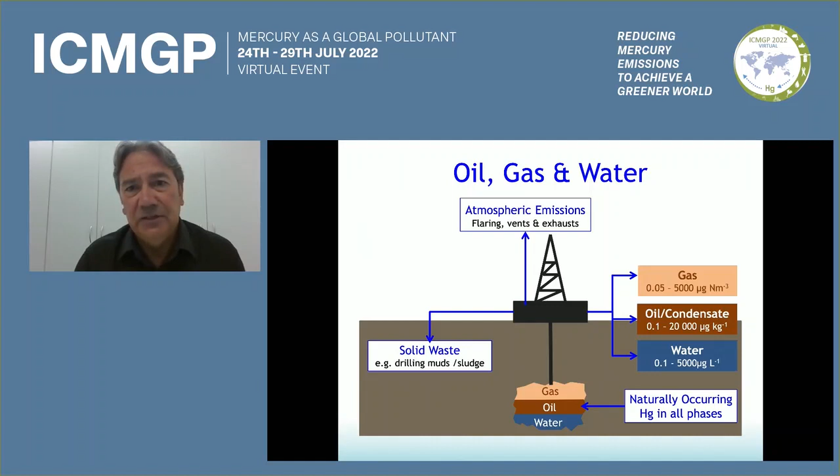During the extraction, of course, we also get some solid waste generated, such as drilling muds and sludge, and also some atmospheric emissions from flaring vents and various exhausts within the process.

Most of the work that we have done has been in Asia, Northern Europe and also South America, which is where the hotspots of mercury are.

The other thing to mention is that there's a general trend in that the deeper the well, the hotter the well, and the sweeter the well, the mercury concentration tends to be higher. As we explore new fields, we're likely in the future to get more fields which are high in mercury.

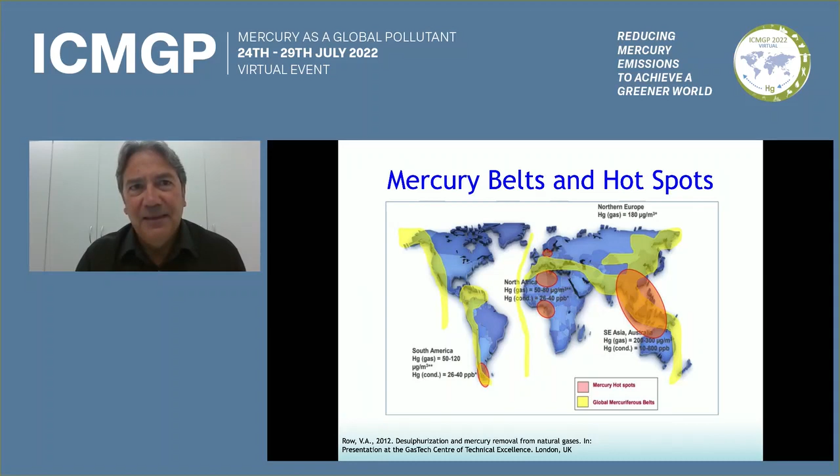The oil and gas industry have been dealing with mercury problems really over the last 30 years. I think at the start, they were a little bit in denial about the amount of mercury they might have in their process.

But these days, I think mercury is well managed, and there's a good understanding within the industry, but there's still a lot to learn.

The main thing to realise is that most of the measurements for mercury in gas are done to protect the process equipment. As mercury flows through a gas plant, for example, it has to go through some cryogenic heat exchangers, which are at a low temperature. Even at low concentrations, this mercury can pre-concentrate and build up, and it can, in some instances, lead to a cold box failure.

Mercury can also poison the catalysts which are used in the refining process. This can lead to plant shutdown, an interruption of supply, and financial losses. And in a couple of cases, there has been explosions due to the failure of cold box components, so there's obviously a hazard involved in that as well.

All of the gas products and oil products that this industry generates are exported with quite tight specifications. If these specifications are not met, then the products are either rejected or they have to sell them at a reduced revenue. So there's some commercial reasons why people want low-level mercury in these streams.

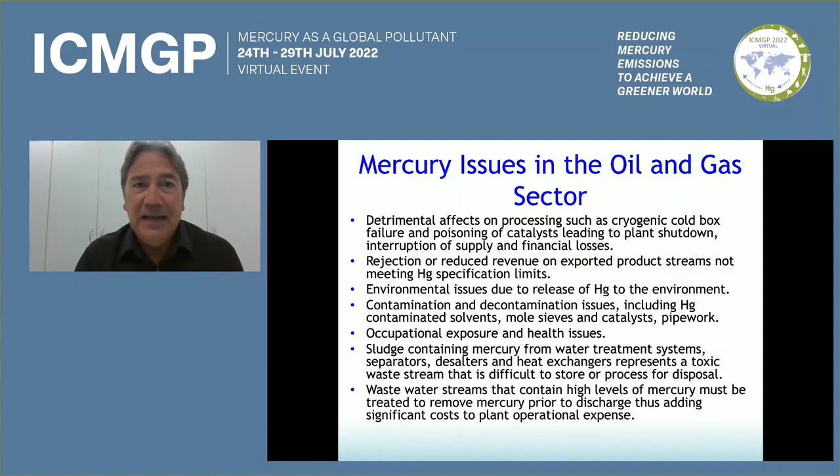So during the extraction, what can happen if the concentration is high, the mercury in the well as it's extracted can start condensing as small mercury droplets. Then, as it goes into the separator, it can fall out due to gravity and get attracted to sludge and waxes. Then that will go into the water phase as ionic mercury and elemental mercury, and it can also go into the oil as sludge and the elemental and dissolved forms.

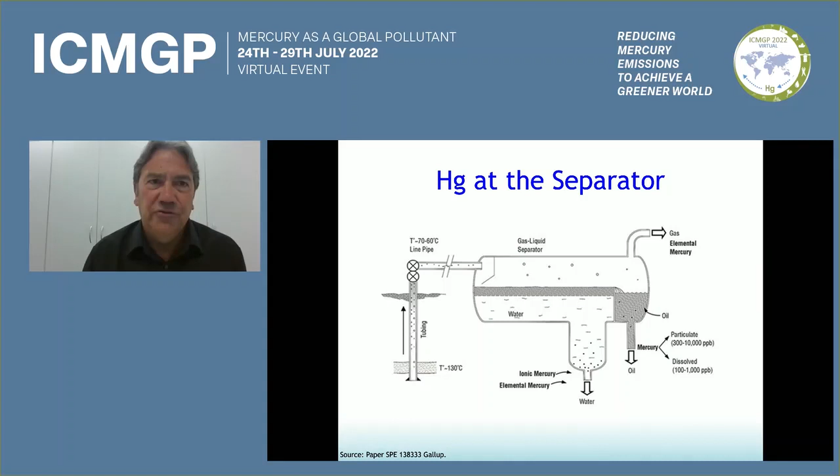The volatile elemental mercury from this process actually goes to the gas phase. So it's a complex operation which is different on every site, and it also depends on the process conditions and the concentration of mercury in the well in the first place. This is an important slide, because what I'll talk about later is the importance of measuring at this location so we can look at the true levels of mercury generated from this industry.

I'd now like to show a very short video clip of elemental mercury condensing on an offshore platform.

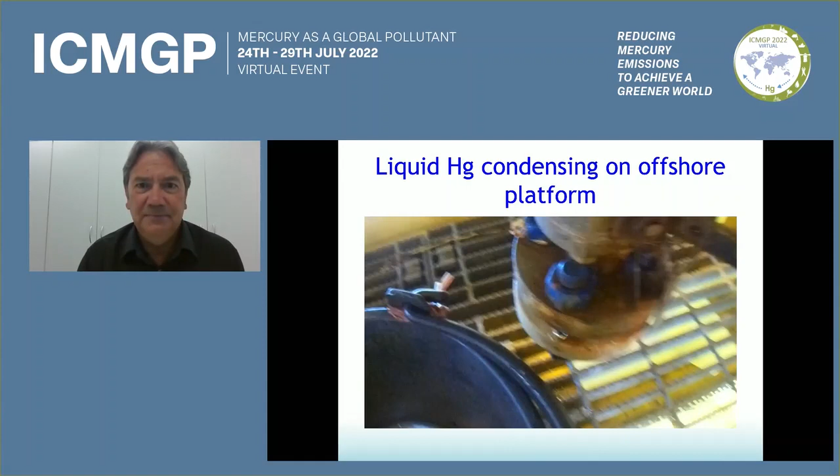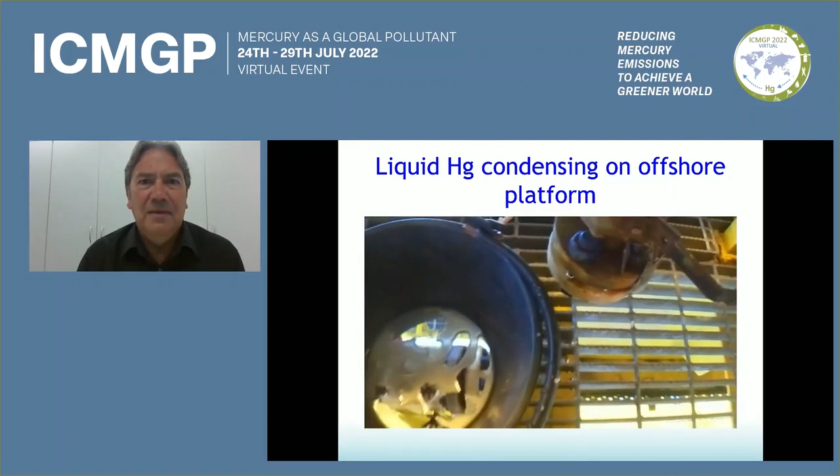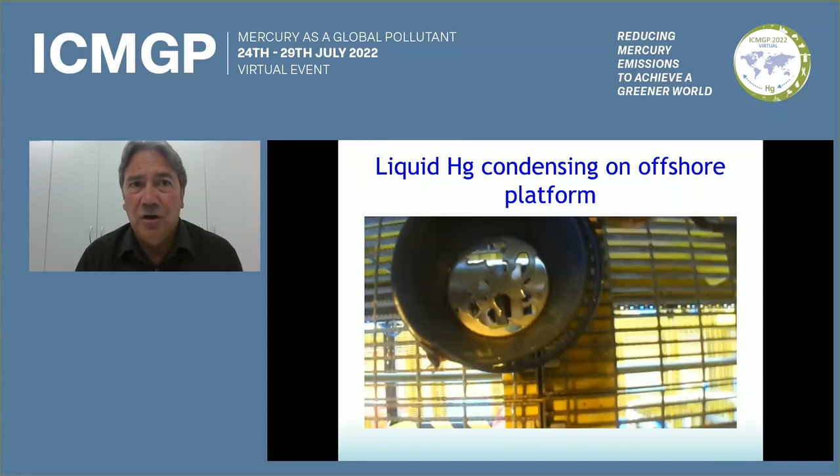What you can see here is pure elemental mercury condensing from the process, and this can build up over a period of time. I've been on sites where they have to release this mercury and decant it off almost on a weekly basis. This is really one of the unaccounted emissions of mercury on these gas plants. This typically only happens when concentrations are high, but there are places in the world that have to deal with this problem.

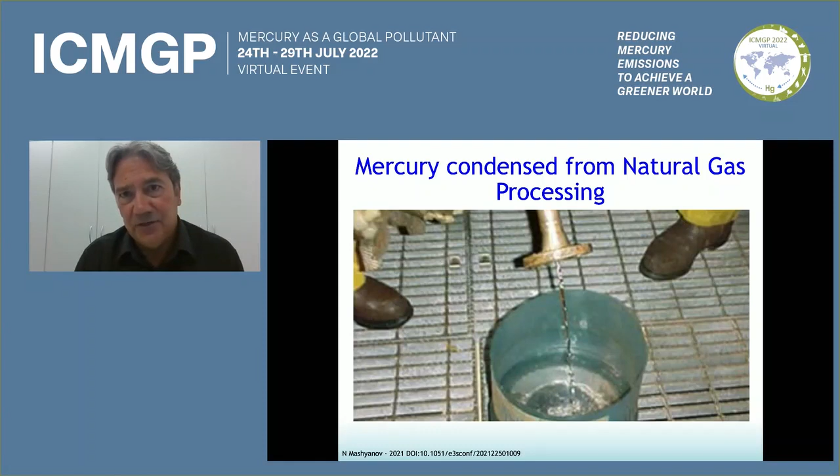You can actually explain this process by looking at the vapor pressure curves and relating the concentration of mercury that we measure to a process concentration. Most people actually forget that the process concentration is highly concentrated, because if you take gas at 1 microgram per meter cubed, for example, that's your measured concentration, and if it's in a process at 50 bar, the actual concentration in the process would be 50 micrograms per meter cubed.

At 100 micrograms per meter cubed, it'll start condensing at about 12 degrees. At 1,000 micrograms per meter cubed, you'll start condensing at about 38 degrees.

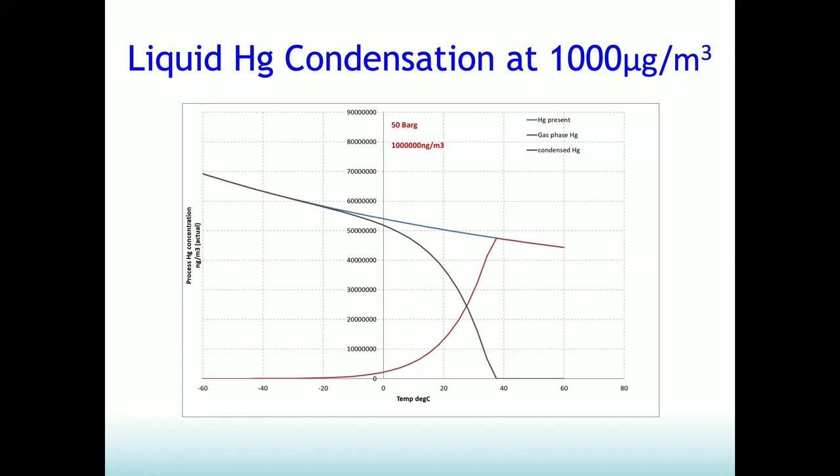So if the concentration is high, there's a temperature drop at the wellhead, you will get mercury condensation. But this condensation can also occur anywhere in the process if you reach saturation conditions, and that is one of the reasons why you get cold box failures.

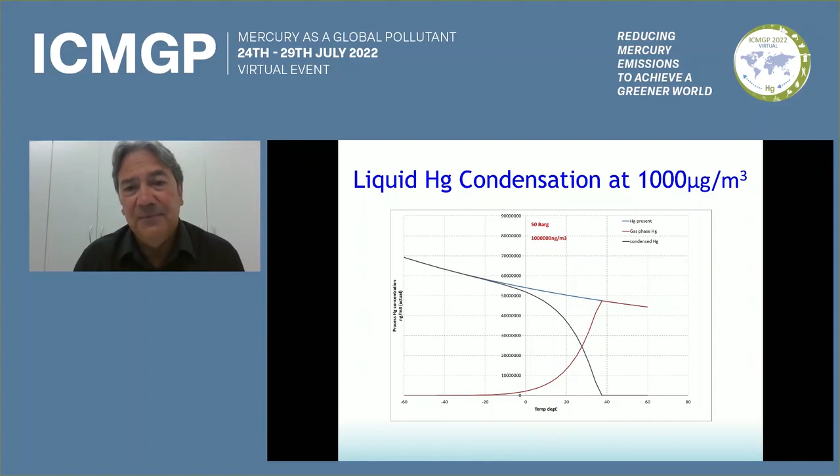During the extraction, you also generate a lot of produce water and drilling fluids, and of course the refining of crude oil generates a lot of wastewater. Approximately 250 million barrels per day of water is generated by the industry, and this quantity increases with age and production rates.

Some of this water gets re-injected back into the well, and some of it is discharged. The exact ratios of what is discharged, I couldn't find this information, but this is the estimate that I've taken a stab at.

The concentration, as I mentioned at the beginning, for produce water is extremely variable. We've seen concentrations between 0.1 ppb and 5 ppm. The discharge limits for the industry vary around the world, and we've seen discharges of less than 0.1 ppb as high as 100 ppb.

The other thing to realise about mercury in the produce water is it's normally associated with particulate material and sludge. So if you filter the produce water, which is a requirement because you have to remove any oil and dissolved solids before discharge, that filtration system will collect mercury. Overall, I would say the discharges are well regulated, and the emission to the environment is probably low from this, but the volumes are very high.

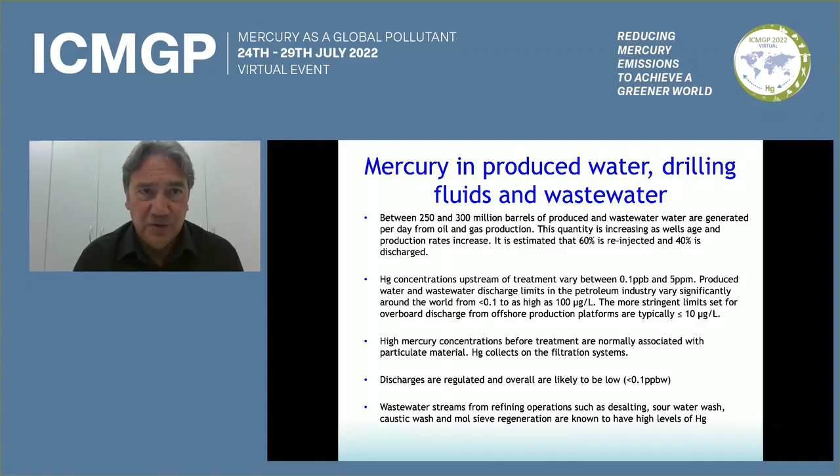In order to estimate the annual discharge, I've taken 5 different concentrations which we've encountered, and applied that to the discharge rates on an annual basis to calculate the tonnes per year we might expect. So if we're down at 0.1 microgram per litre, just looking at the 40% discharge into the sea, we're probably around 0.6 tonnes per year.

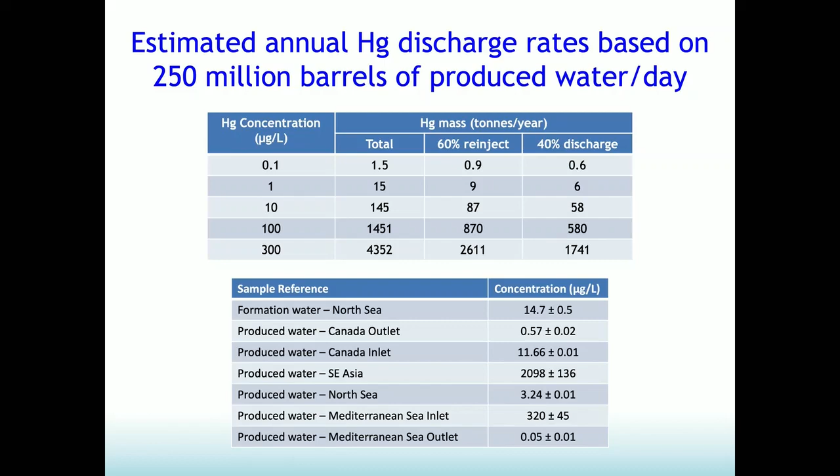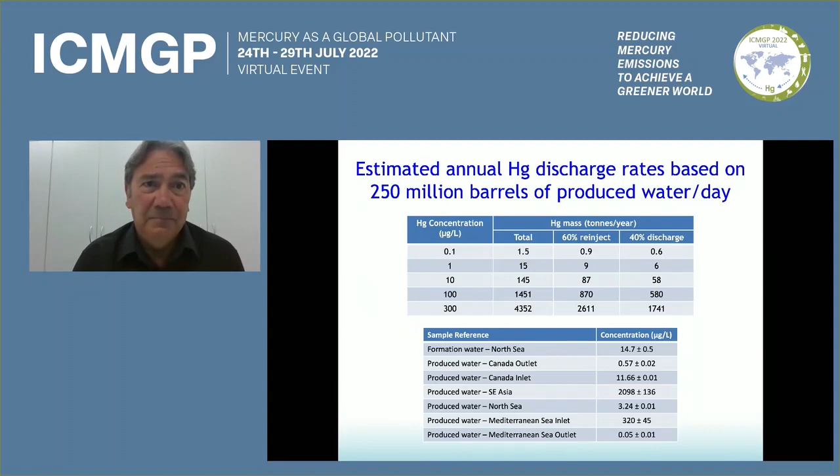But I think what we have to consider here is the amount of mercury that's generated from the process, which has to be treated. In this case, you could have several hundred or even maybe thousands of tonnes of mercury which has to be removed by the water treatment. So the fate of this mercury needs to be considered. In this slide, I put some concentration ranges that we've encountered from our work in the field.

So I've got 2 case studies I'd like to mention. The first one is an offshore platform in the Mediterranean Sea. This produces gas and crude and also about 4,200 barrels per day of produce water. The inlet concentration at this site was measured to be 320 ppb and the discharge about 0.05.

We know from this site that the filtration process removes nearly all of this mercury, but it still means that the site generates about 100 kilograms of mercury per year, which is collected in the treatment process. And the fate and disposal mechanisms of these filtration systems is not really known or documented to my knowledge.

Another example case study is in the South China Sea. This is some work by Darrell Gallup. Again, they have about 20,000 barrels per day of produce water, high concentrations. But in this case, they decided to inject the produce water back into the well. Before they do that, they still have to filter and clean the water, and that could equate to about 230 kilos per year.

So this is just 2 sites. And I'd like you to bear in mind that there's actually 12,000 offshore platforms worldwide. So even if this concentration is low, this is still a significant amount of mercury.

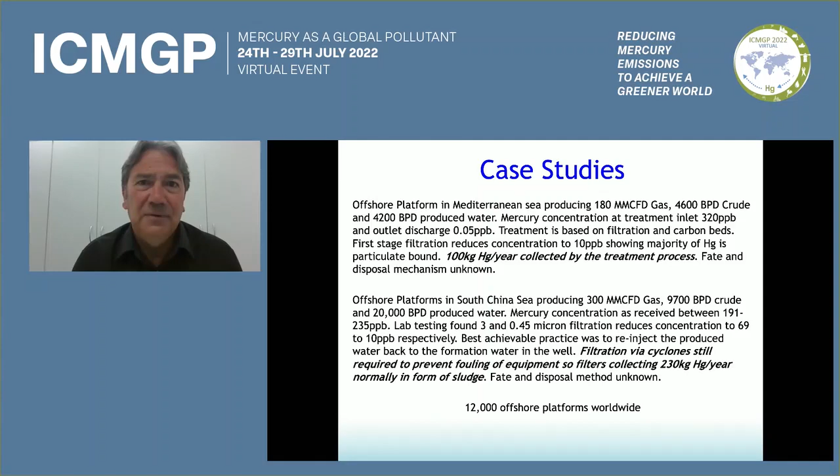During the extraction, drilling fluids are used, and it's quite well known that water-based drilling fluids, which contain barite as a weighting agent, contain some mercury. So we took 10 commercial barites, tested them for total mercury content, and found an average of 22 parts per million. This was a little higher than we expected because the US specification for dry barite is around 1 ppm.

So if you look at the annual discharges of drilling fluids, that equates to about 0.5 tonnes of mercury if you use the US specification, or about 11 tonnes of mercury per year if you use the mean that we found.

I couldn't find much information about drilling discharges onshore, but the amount of discharge is much higher - it's 53 million tonnes. So I think it's very difficult to establish the amount of mercury that's coming from these drilling fluids, but again, it could be quite significant.

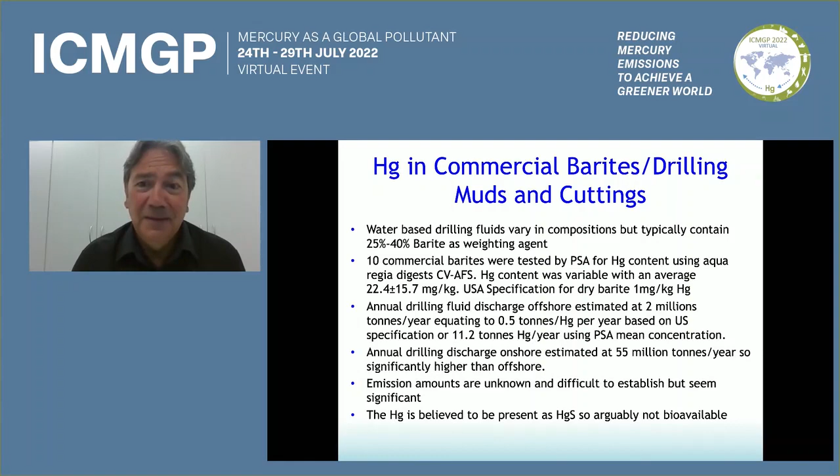And it's believed that the mercury is in the form of mercury sulfide, so arguably it's not bioavailable.

Now coming on to crude and condensates. We've already mentioned there's a very wide concentration range, but speciation is more complex, which means it's more difficult to predict how the mercury will behave during the refining process.

We do know that certain processes like desalting and caustic wash treatments would remove mercury. And we also know that when you stabilize a crude, which means you get rid of the gaseous components, the elemental fraction that's dissolved in that crude is released to the overheads.

It's also well known and accepted that during processing, the mercury tends to pre-concentrate in the lighter fractions. It also gets lost in the actual refining process in all of the pipework and vessels and collects in the sludge. So it's extremely difficult to do mass balances on these type of facilities.

Mercury cleanup is used, but predominantly mainly for the lighter products and the refined products, and there are some quite tight specifications that the industry has to meet. But the heavier streams like diesel, kerosene, fuel oils are not actually normally cleaned up for mercury.

And so there's a lot of these fuels that actually are combusted in various processes, and they haven't really had their mercury removed. So that again is potentially quite a large emission due to gas emissions.

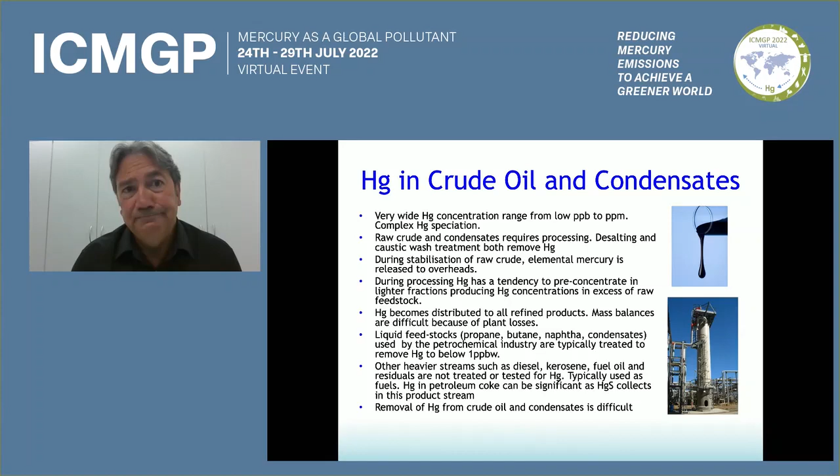So what I did is I took the annual crude production per year in tonnes per year for different regions. Then I reviewed the literature, and from there, there's a few papers which assign average values for each region. This is very speculative and it depends on what paper you read.

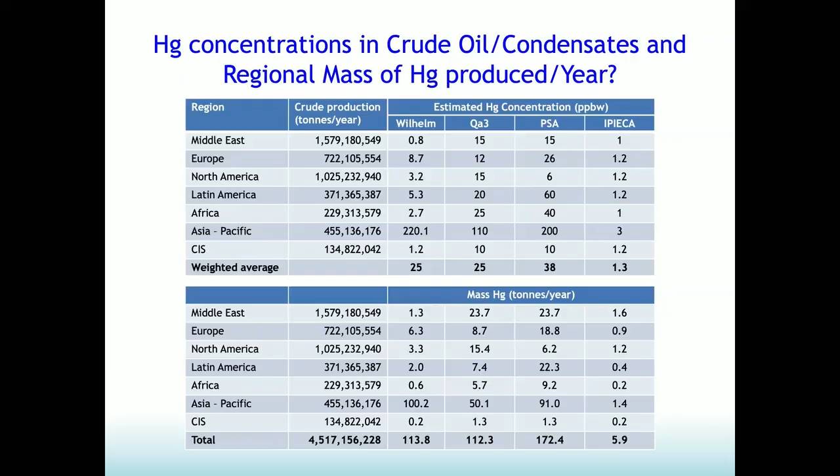There's a good paper by Mark Wilhelm. There's some nice data that Qa3 have presented - this is another testing company based in the UK, specialising in the oil and gas industry. We have our own data, and also there's IPIECA and UNEP reports.

And when you apply those numbers to the annual production rates, you can see that there's a big discrepancy on what people believe is being emitted, between almost 6 tonnes a year to 170 tonnes a year, depending on which data sets you take.

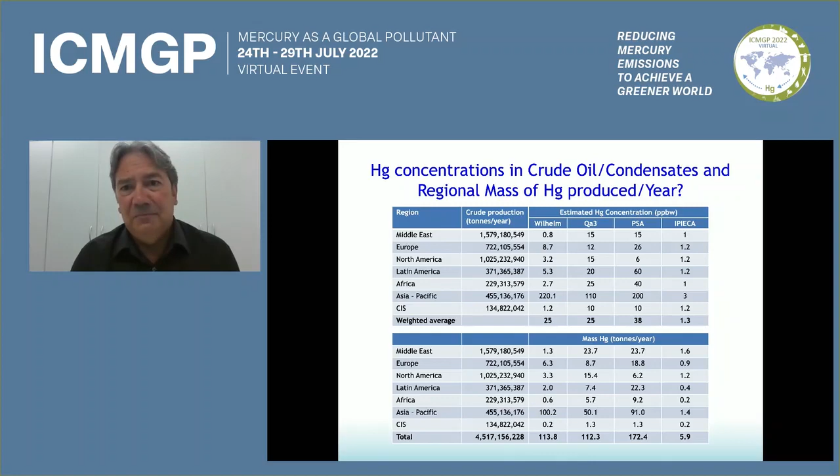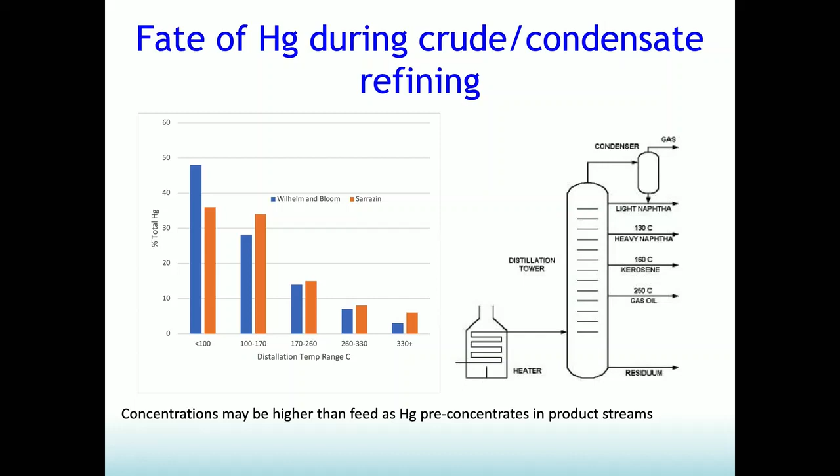We do know that during the refining process, mercury goes into all of the products, and as mentioned previously, the mercury in these feedstocks tends to go up into the lighter fractions. Even if these feeds contain some particulate mercury, a lot of that particulate mercury is mercury adsorbed to particles. During the distillation process, this heats up these particles and the mercury gets released to the lighter fractions. If there's cinnabar in the sample, or mercury sulfide, then this would tend to go to the residue and go through the vacuum distillation process to the petroleum coke.

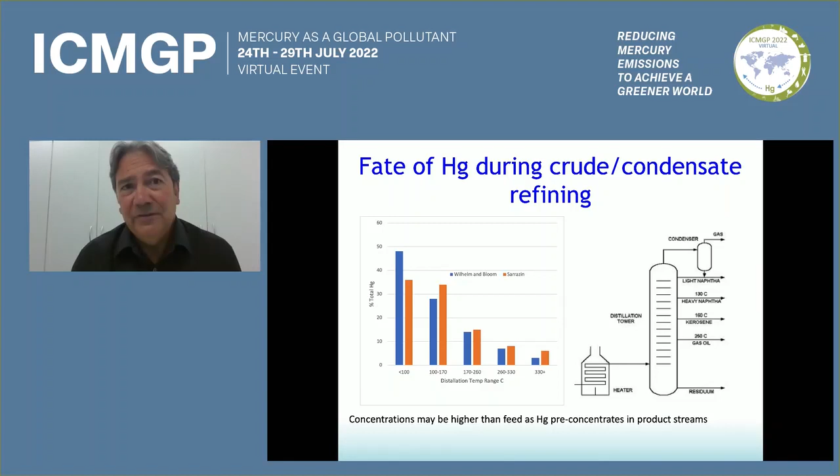Another confusing part about mass balances is that very often when you measure the streams from the refinery, they can be at a higher concentration than the feed, and that's because this mercury pre-concentrates in those streams. So you have to look at the mass flow rather than the concentration flow.

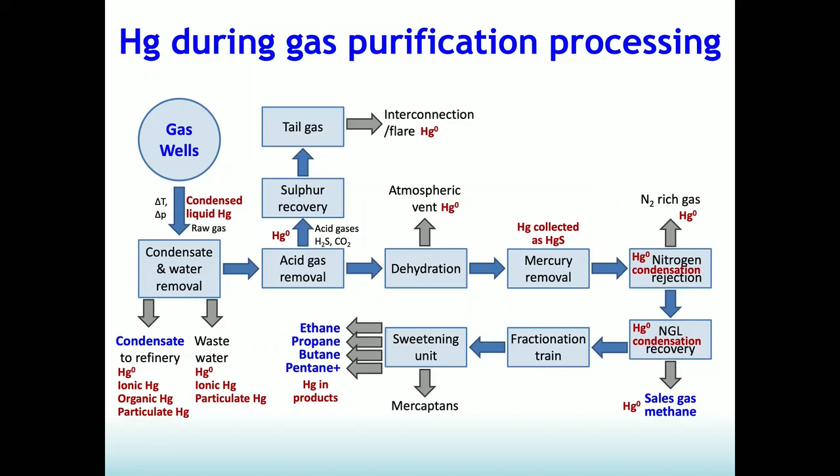Mercury removal on gas plants is very well established and actually very efficient, and it needs to be, because the concentration you need to get down to, to protect the cold box, is around 10 nanograms per meter cubed. Our experience is that these mercury removal units work extremely well in the field, so most of the mercury from the gas actually goes onto the mercury removal adsorbent.

You can also get some mercury losses during the nitrogen rejection and also in the fractionation train, because you're dealing with very low temperatures and very high flows. So even if the concentration is low, it will still collect in this process. It's just about managing this mercury that is not removed. And then, of course, you get mercury in the products, which have to meet the specification.

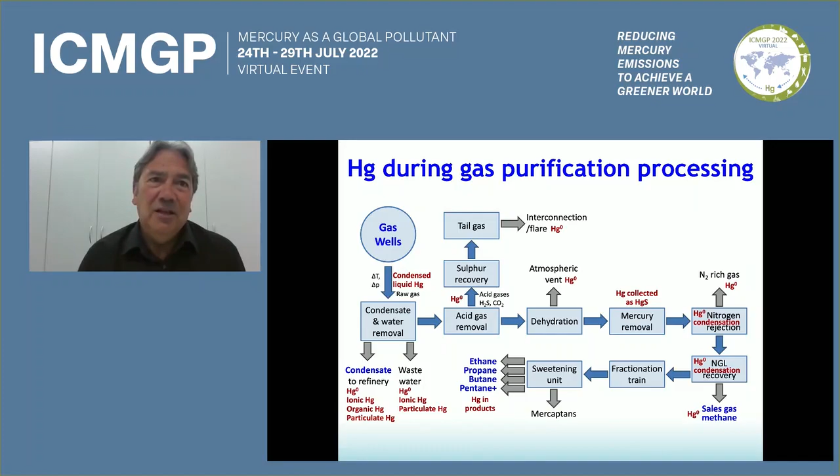Again, the complication is that this mercury will collect in the process in all of the pipe work, so it's very difficult to do a mass balance.

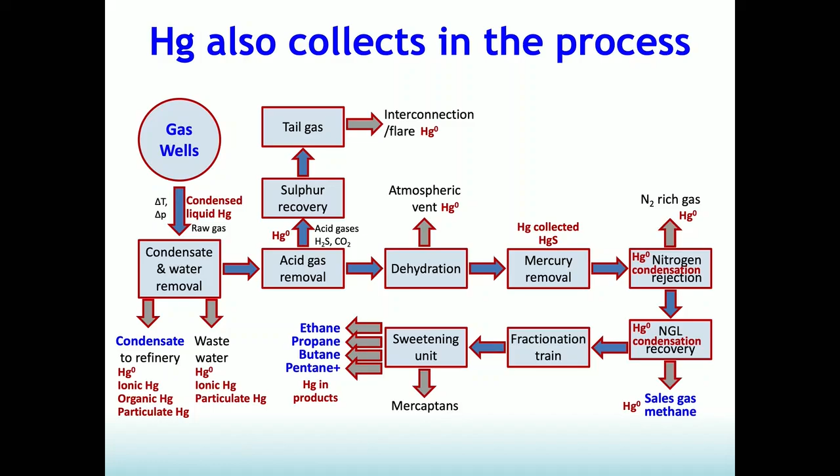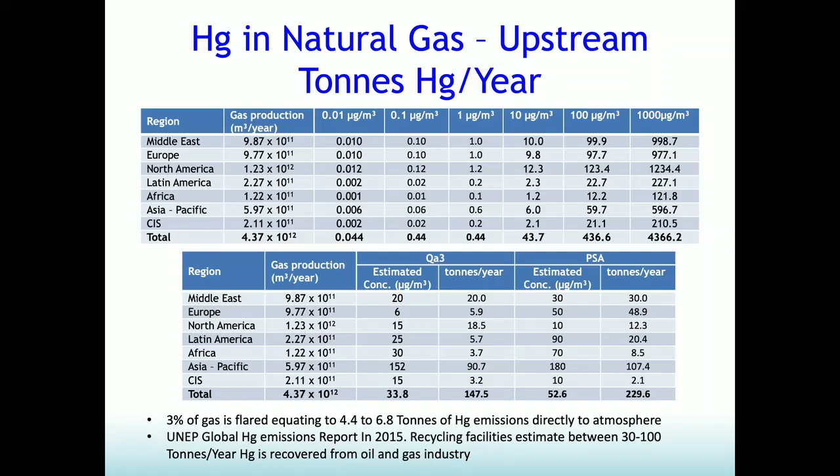I've done the same with the gas as I did for the condensates. I've taken the gas production rate in meter cubed per year for each region, and then I've hypothetically assigned a concentration that we would expect for an average, ranging from 0.01 microgram per meter cubed, which is the specification limit for most sales gas, up to 1,000 micrograms per meter, which is a real extreme, but not impossible to get these levels.

You can see here that there's the potential for a lot of mercury generated from the process and hopefully collected by the adsorbent material, but some of this will be emitted due to the processing of the gas. I've also taken some data that QA3 presented and some of our own personal data, which includes a review of the literature. My best estimate is that the upstream generation of mercury is around 147 to 230 tonnes per year. It's also worth noting that about 3% of this gas is flared.

Whatever number you want to take from these tables, that could amount to an appreciable amount of gas. Flaring normally occurs upstream rather than downstream on the products, so I would say it would be the higher levels that are being flared.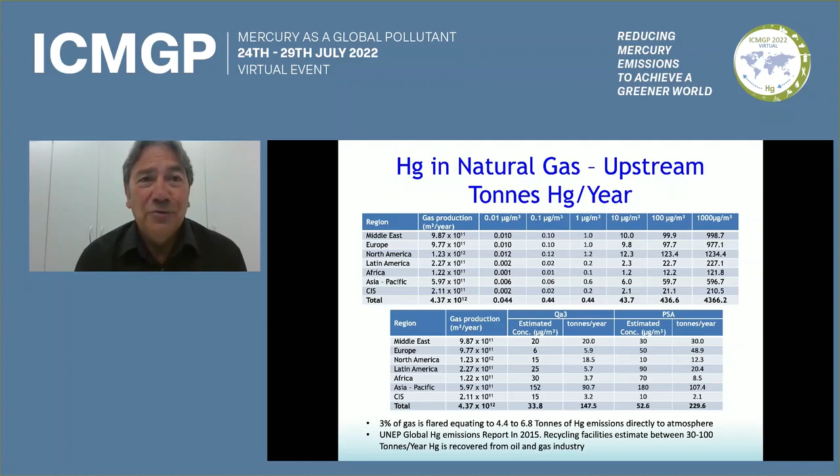UNEP have obviously published some good reports on this topic, and I noticed in one of their reports, they said that they contacted mercury recycling companies. In the year 2015, they claimed that they collected between 30 to 100 tonnes of mercury from the industry. But if you look at the numbers I've presented in this table, there could be quite a difference between what is being recycled and what is being generated.

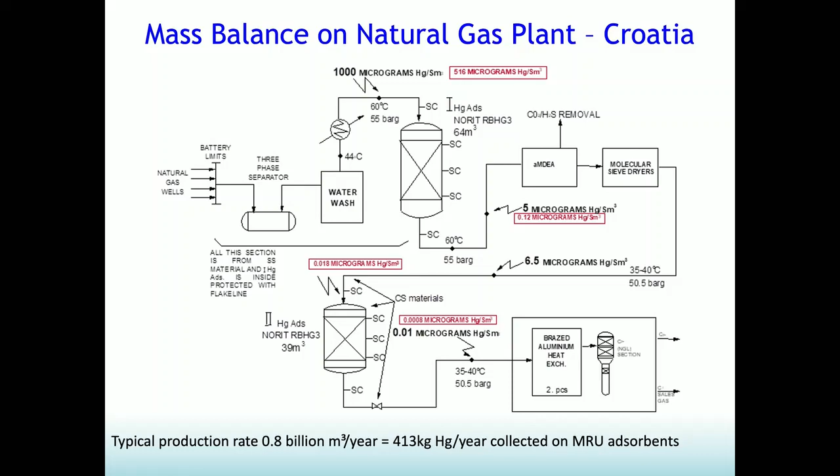There's quite a lot of work going on with decommissioning, and the sludges and debris from the pipelines that people are encountering are extremely concentrated in percentage levels of mercury. So the industry actually generates quite a lot of waste products, and it would be quite interesting to get a better understanding of how these are processed and dealt with.

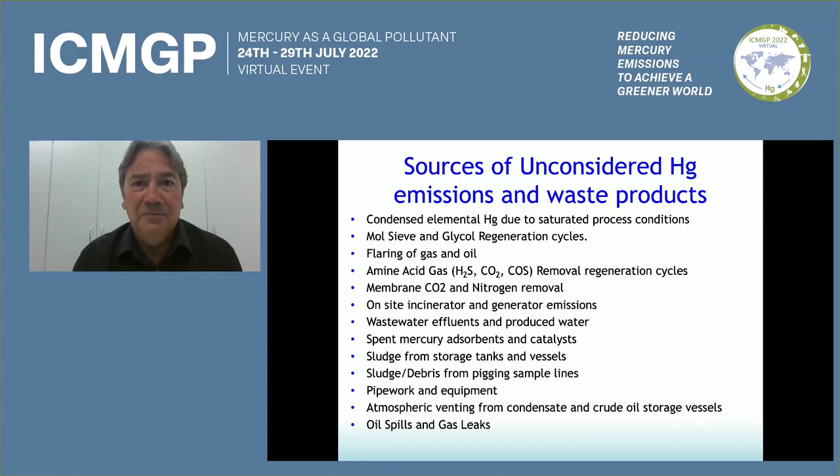So Leslie actually asked me to cover 4 questions. The first one was, what is the major issue and problem in this area? And I would say it's really the current mercury inventory. I don't think it's truly accurate, and it's not fully understood.

I think a lot of the mercury data that is used is based on exported products, and it doesn't really reflect how much is generated during the processing and the extraction.

The next question was, what are the potential solutions to this problem? I would like to see more data reported, and maybe it'd be nice if it was mandatory, to report the levels in the oil, the gas, and the water right at the point of extraction, at the primary separator, because we know the metering rates here.

If we could get a good, accurate number on how much is in these streams before processing, we'd have a better characterization and accountability of how much waste and mercury is actually being generated.

Why has the problem not been solved yet? Well, I'd say there's no real incentive to do the measurements here. It's actually difficult to do the measurements there as well.

Most of the measurements that are conducted are all about testing the efficiency of the removal system and also on the products, to make sure they meet specification. Every now and again, there's a study done on inlet concentrations, but it's not routine testing.

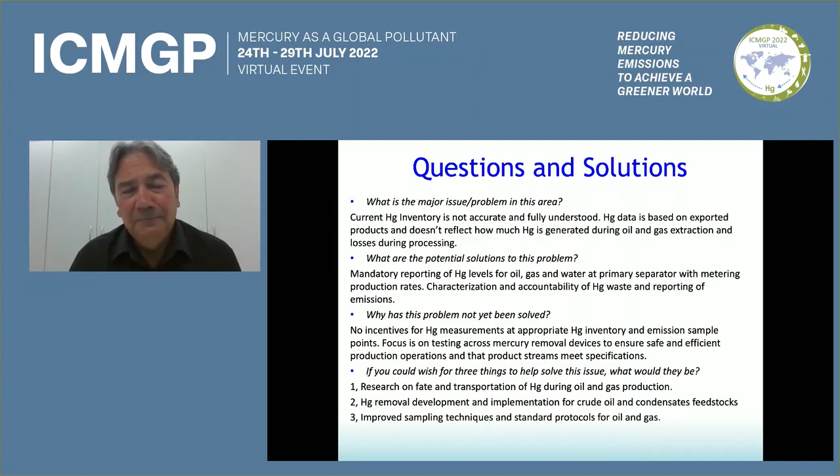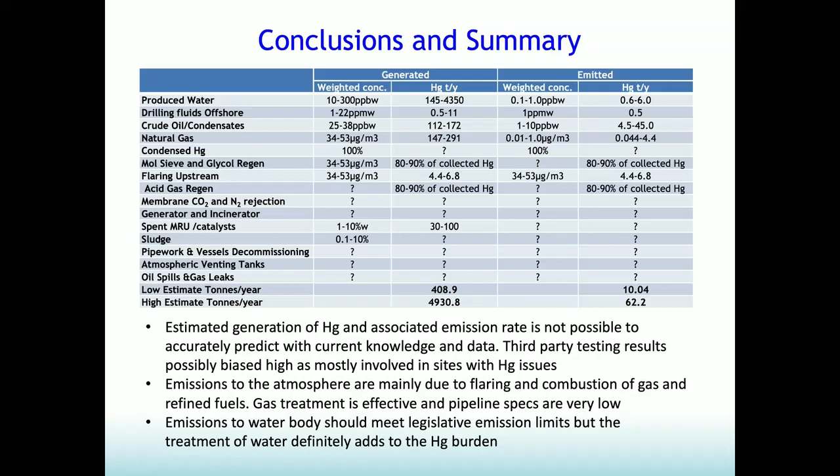So my best estimate, the emitted mercury is between 10 and 62 tonnes, but the amount generated is closer to 400, or maybe even as high as 5,000, tonnes per year. But of course that is managed and collected within the process, on the adsorbent systems. So it's difficult to predict, to really get a handle on how much is being generated and what the associated emissions are.

I think some of the data I've shown, and maybe some of the data from QA3, might be biased high, because we normally get involved when plants have issues with mercury. And of course, there is an emission to the atmosphere due to flaring and combustion, and there's an emission to the water that has to be considered as well.

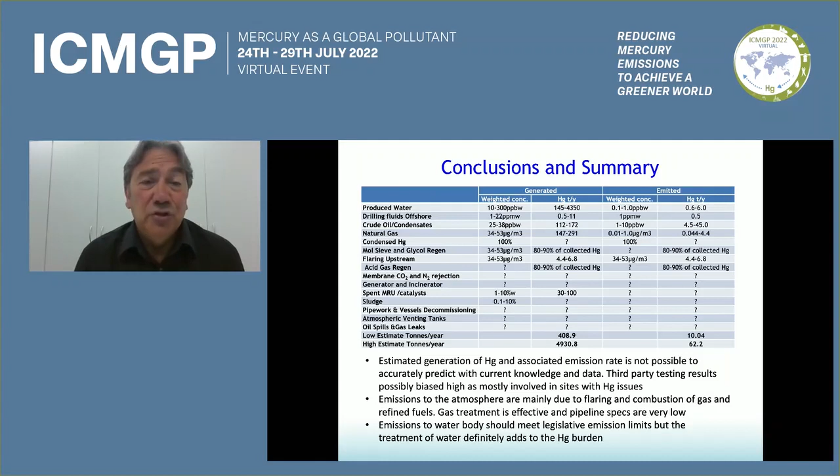Okay, I'm sorry I've gone over the time, but it was hard to get all the information across in the time that I had. Thank you.

Thank you, Warren. As they say, can open, worms everywhere. It's interesting to see that we might not know as much about this sector as we think we do, and there may be more of a problem than we're aware of, something certainly UNEP should focus on in future to make sure the global inventory is correct and that we have a full cradle to grave understanding of where mercury is going in the environment.

Yes, so one question that's come in: how accurate are these measurements? You're talking about very low concentrations and trying to do mass balances. How accurate are the measurements, and how easy is it to go through the sampling and measurement process?

I think you have to treat the gases, the water, and the oil, the crude and the condensates differently because they have different issues. In a lot of cases, when we're sampling water, especially inlet measurements, it's difficult because you have a condensate, a water material, which has got oil and suspended particles. And so if the lab filters the sample, they're going to get low results.

Also, these streams contain elemental mercury, and so by the time you've collected the sample into a bottle and sent it to a lab, you're likely to have some mercury losses. Most of these measurements are done onshore.